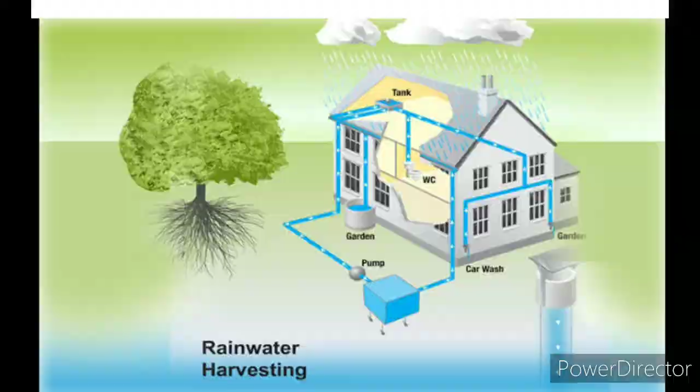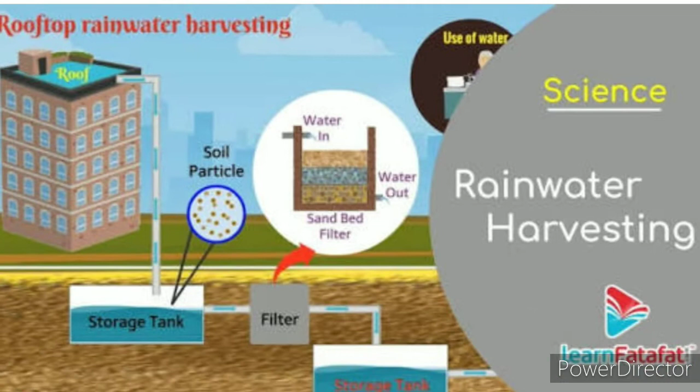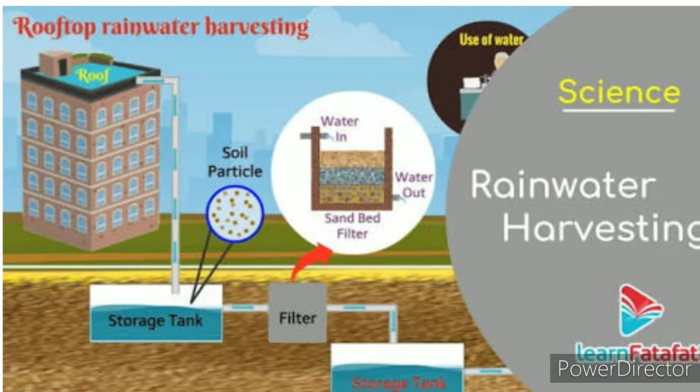Methods of rainwater harvesting: the first one is rooftop rainwater harvesting. Rooftops are excellent rain catchers. The rainwater that falls on the roof of houses, apartments, and commercial buildings is collected and stored in a surface tank and can be used for domestic purposes.

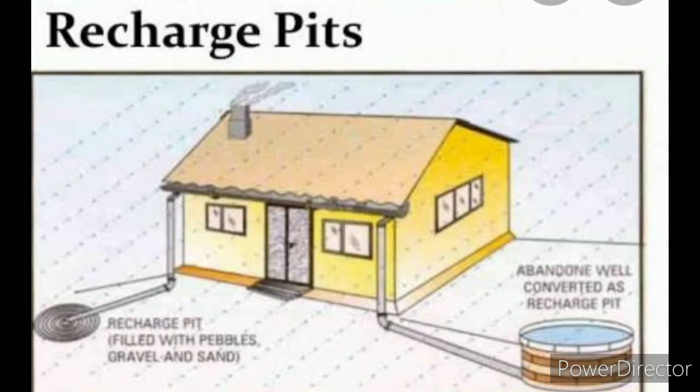Another method is the recharge pit. In this method, rainwater is first collected from rooftops or open spaces and directed into percolation pits through pipes for filtration. After filtration, the rainwater enters the recharge pits or ground wells.

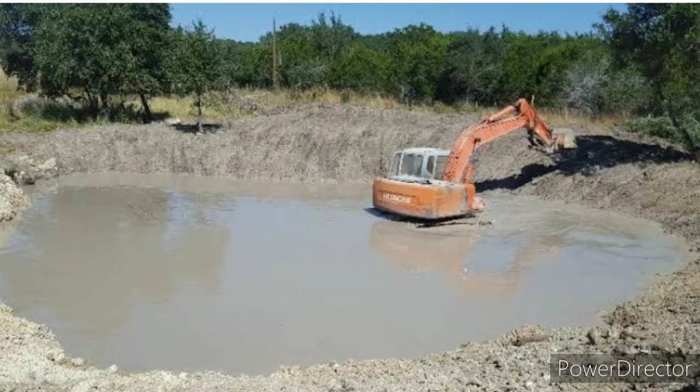In rural areas, people adopt a variety of water collecting methods to capture and store rainwater, such as digging of tanks or lakes and Uranis. Digging of tanks is one of the traditional water harvesting systems in Tamil Nadu. These are constructed so that if the water in one area overflows, it automatically gets diverted to the areas of the next village, as these areas are interconnected.

Uranis are small ponds to collect rainwater. The water is used for various domestic purposes like drinking, washing, bathing, etc. These ponds cater to nearby villages.

Kallanai Dam, also known as Grand Anicut, is the fourth oldest dam in the world, constructed by King Karikala Chola. The dam is located on the river Kaveri, approximately 20 km from the city of Tiruchirappalli.

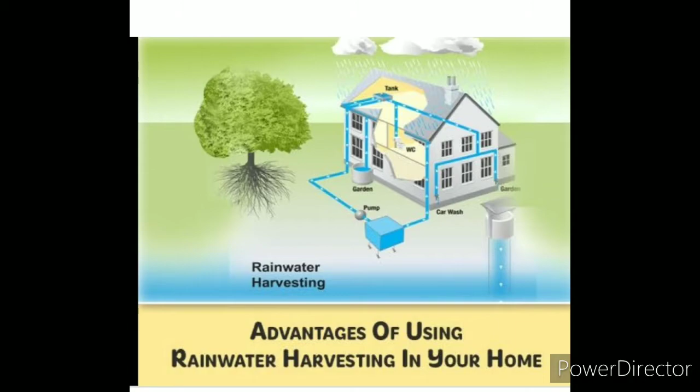Next are the advantages of rainwater harvesting. It helps to overcome the rapid depletion of groundwater level, meets the increasing demand for water, and reduces flood and soil erosion. Water stored in the ground is not contaminated by human and animal waste and hence can be used for drinking purposes.

Next is electrical energy management. Electricity or electric power is produced by generators. The generators are operated by turbines attached to them. The turbines are rotated by steam, moving water, or wind power to produce electricity.

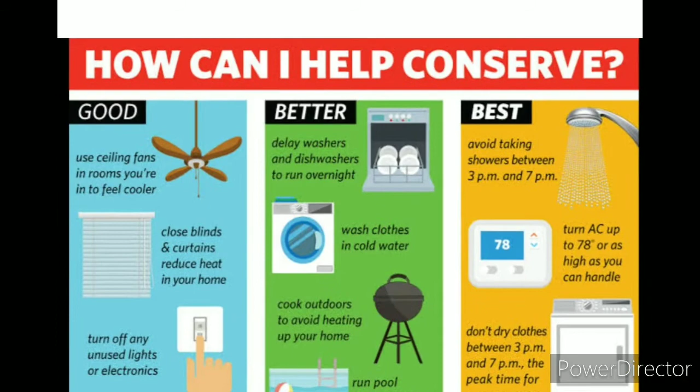Some measures can be taken even at home and school to save electricity. We can use energy-efficient appliances like compact fluorescent lamps (CFL), light emitting diode (LED) bulbs, and other electric equipment. Switch off lights, fans, televisions, and other electrical appliances when not in use. Also switch off the mobile phone charger when not in use.

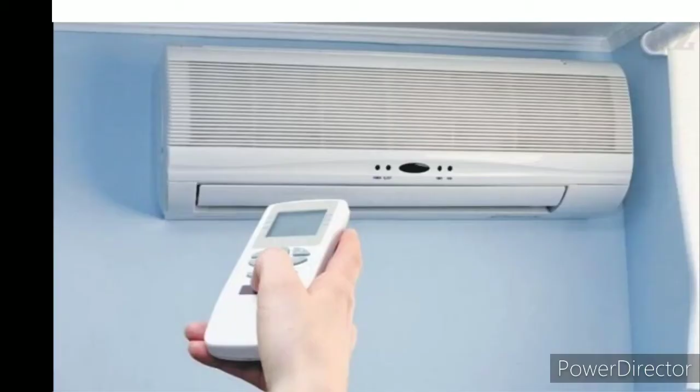We can also use alternative sources of energy such as solar energy. A solar water heater system can be used instead of an electric water heater, and we should minimize the use of air conditioners.

Electronic equipment contains many hazardous heavy metals such as lead and cadmium that can cause severe soil and groundwater pollution. E-waste, that is electronic waste, dumping yards and the places nearby are polluted and cause severe health hazards.

Next topic is sewage management. What do we mean by sewage? Wastewater generated from domestic and industrial processes. This sewage water results in agricultural contamination and environmental degradation.

Sources of sewage or wastewater include domestic purposes or household activities, dye and textile industries, leather industries, sugar and breweries industries, and paper and pulp industries. This wastewater cannot be directed anywhere as is, but should be treated and reused.

Now let's discuss wastewater or sewage treatment method. The conventional wastewater treatment methods involve pre-screening, aeration, sludge management and water reuse.

Pre-screening: in this method, wastewater generated from domestic and industrial activities is screened to remove soil and solid particles. The solid particles may be wooden pieces, plastic, papers and other impurities. This method is also called the primary method or physical method.

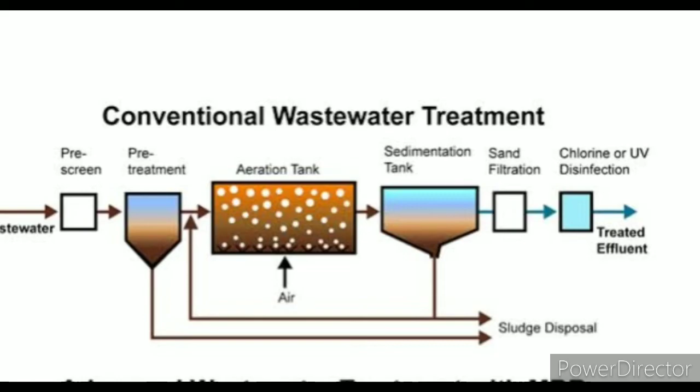Next is solid waste management. Solid waste mainly includes municipal waste, hospital waste, industrial waste and e-waste. Solid waste dumped in the soil results in land pollution. Solid waste management involves the collection, treatment and proper disposal of solid material discarded from household and industrial activities. Now let's look at methods of solid waste disposal.

The first method is segregation, which is the separation of different types of waste materials like biodegradable and non-biodegradable waste. Sanitary landfill is another method of solid waste disposal, in which solid waste is dumped into low-lying areas.

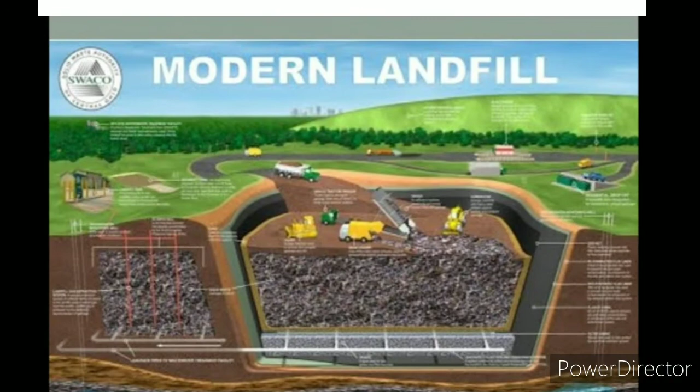The layers are compacted by trucks to allow settlement. The waste materials get stabilized in about 2 to 12 months, and the organic matter undergoes decomposition.

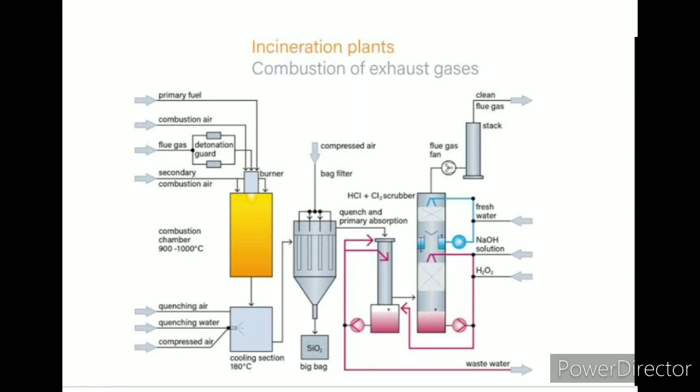Another method is incineration. Medical waste can be discarded by incineration, which is the burning of non-biodegradable solid waste in a properly constructed furnace at high temperature. Another method is composting, where biodegradable matter of solid waste is digested by microbial action or earthworms and converted into humus.

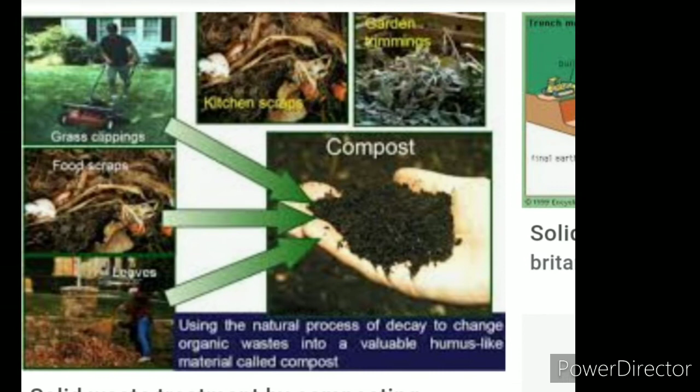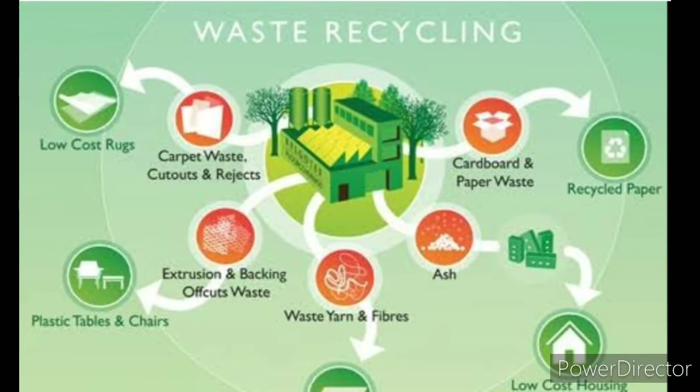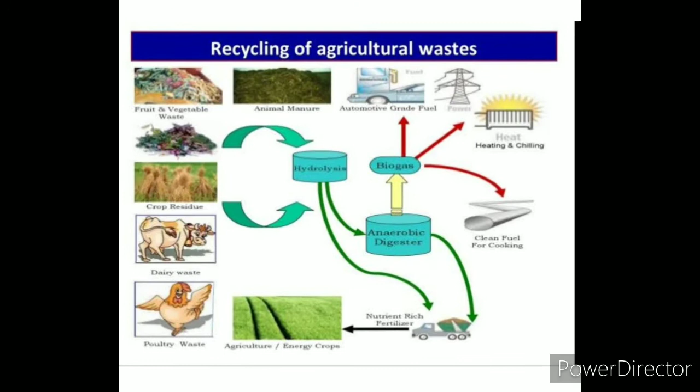Recycling of waste: papers from old books, magazines and newspapers are recycled to produce paper in paper mills. Likewise, agricultural waste like coconut shell, jute, cotton stalk and bagasse of sugar cane, which is the residue left after extraction of juice from sugar cane, can be used to make paper and cardboard. Paddy husk can be used as livestock fodder.

Cow dung and other organic wastes can be used in a gobar gas plant to provide biogas and manure for the field. Finally, for effective waste management, everyone should adopt the 4R approach: reduce, reuse, recovery and recycle.

Let's recall now. Conservation is a process concerned with the use, preservation and proper management of natural resources, protecting them from destructive activities of human beings. Conservation of natural resources contributes to the social and economic development of the country. Forests of a country constitute a major asset for its people.

A National Park is a reserved area for the conservation of entire wildlife including plants and animals. A sanctuary is a place reserved exclusively for the use of animals.

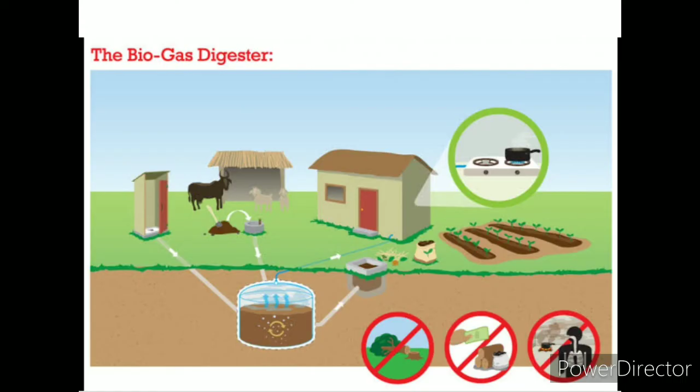A solar cell is a device that absorbs sunlight and converts it into electric energy. A solar water heater does not require electricity; it heats up water directly from sunlight. Biogas is produced by the anaerobic decomposition of cow dung.

The technique of collecting and storing rainwater for future purposes is known as rainwater harvesting. Unwanted, non-working and outdated electronic products become e-waste.

Dear students, it is our duty to take care of the environment we live in. So far, avoid wastage of water, avoid usage of plastics and other non-biodegradable materials, and also use our resources carefully so as to preserve them for future generations.